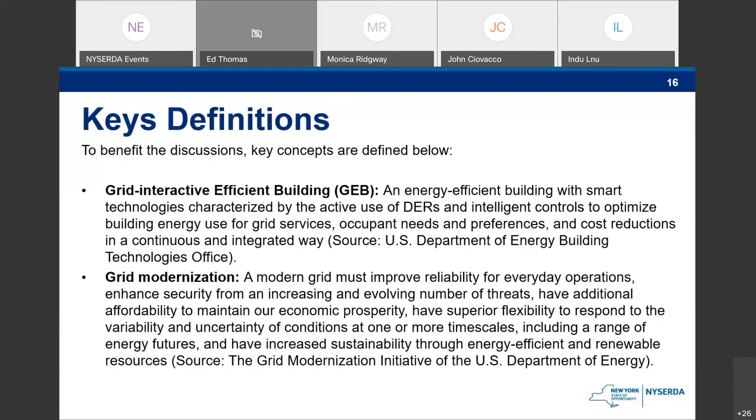As noted, we're going to start with a series of presentations. I'm not going to read these word for word for you, but Cara Carmichael is a principal at Rocky Mountain Institute. My quick read of this is that she's a grid interactive zero energy building expert, and so I presume that's what she'll probably talk to us about. Again, you can look at these at your leisure. The next is Rebecca Kraft, who is an electrification expert with lots of rate design experience and has worked inside utilities as well, which is good. She's with Sidewalk Labs, an advisor to them.

Dan Egan is Senior Vice President of Sustainability and Utilities for Vornado. He comes at this with a real estate perspective, over 30 million square feet under management. So that's a really important perspective when we're talking about GEBs for sure. And then lastly is Ed Thomas. He's the Executive Director of Peak Load Management Alliance, which pretty much says what he's going to talk about. So I'm going to not belabor that at all and get us right into these speedy presentations, and therefore, Cara, you're up.

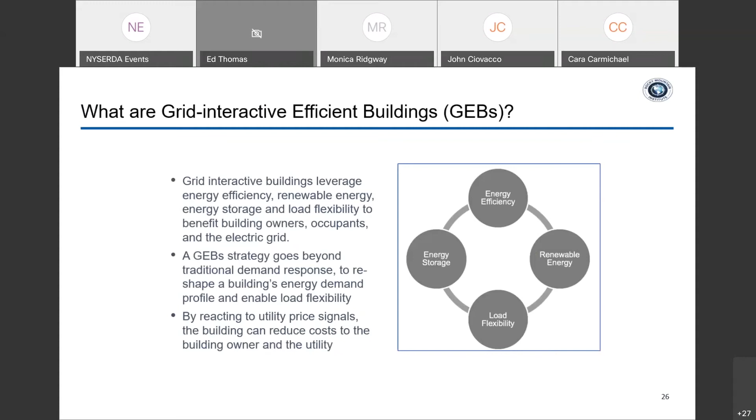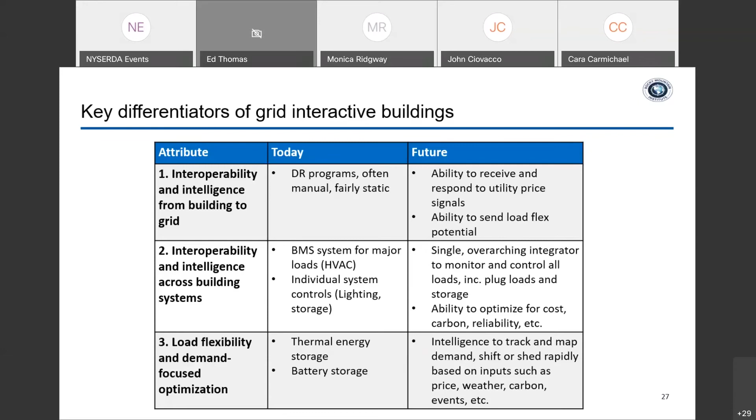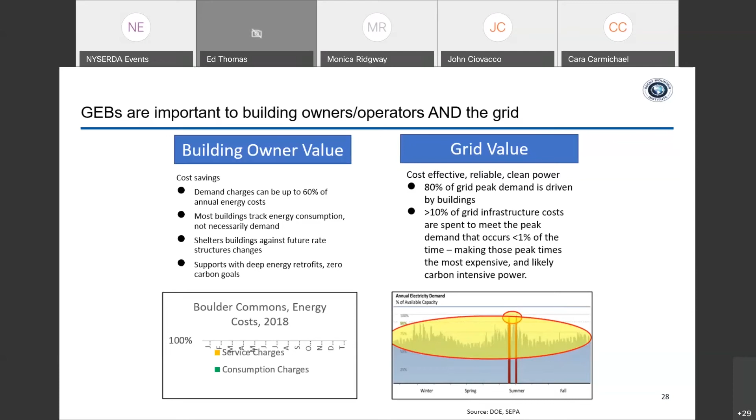So it's also worth noting that in New York State, there's some correlation between wholesale price and emissions, which is good, whereas in other parts of the country, like California, there's a gap that many utilities are struggling to rectify through rate structures.

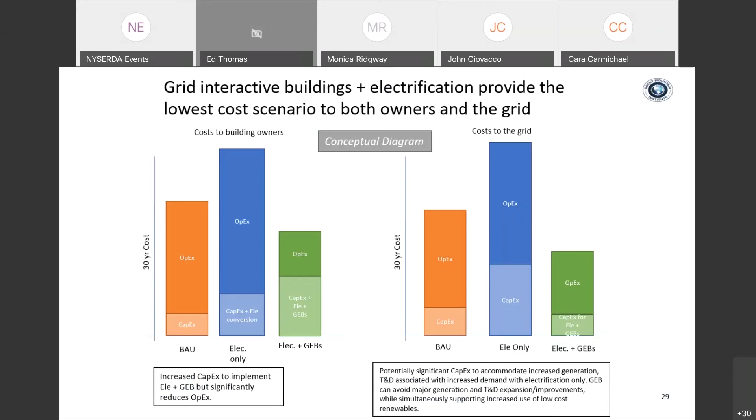So the second topic I just wanted to share with the group was some work that was done by a task group under the General Services Administration Green Building Advisory Committee. And so about a year ago now, we published 13 policy recommendations around grid interactive efficient buildings, and I'm thinking it could be a good resource for this group.

So next slide. So there were 3 main categories for these recommendations, and I'm just pulling the highest priority recommendations from that. And it's worth noting that New York has a head start here, since there's already somewhat of a channel for distributed energy resources, that market created through the REV process. So of these high priority policy recommendations, I think the 3 that are most relevant are A1, B1, and C1.

So A1 provides language for goal targets that are not only energy use intensity focused, but also demand focused. And since this has been done, several key efforts in the industry are actually leading in some metric creation around what a demand target could look like, including Lawrence Berkeley National Lab's Flex Lab work, as well as New Buildings Institute's Grid Optimal initiative. And I think New York already has an edge here as well with Local Law 97.

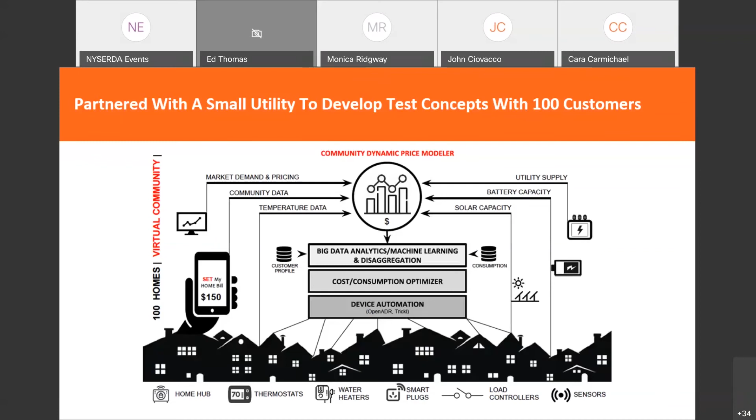On the commercial side, similar kinds of problems. Studies show that the buildings use way more energy than their code compliance model, and that energy use varies widely between buildings, even though the age and ratings may be the same. We also know that tenants drive a lot of this use, and they don't have a lot of opportunity to control temperature, hot water, lighting, plug loads. No one's looking, and no one's controlling.

And finally, we think that most equipment is run with a set it and leave it approach, where loads can change things. Often there are lease structures that prohibit efficient changes for optimization and efficiency, and tenants can't really get what they want when they want it. So as on the residential side, we think that first studying and then automating a lot of this opportunity is critical, so tenants don't have to pay attention to energy demand when that's not their business.

But we think building automation has to really provide information needed in the moment to plan for the right outcomes in the next moment and beyond. And that has to shift over time and learn over time. It also has to be that the systems that do this are kind of open source, modular, and replicable. Otherwise, it's way, way too expensive to do this kind of thing on a one-off.

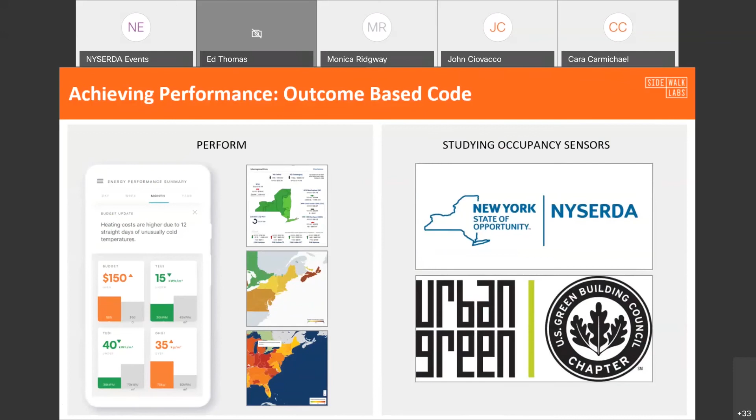And we started to, and we're interested in doing more of this, which is adding occupancy counters to dozens of new buildings in New York to better understand the relationship between energy and occupancy. And we're exploring the grid side of the NYISO right now. And then let me talk some more about what we're doing in Toronto.

It has all the components I mentioned before about the rate. We have proposed there a thermal grid, partial geo exchange, waste heat recovery, that design change. The idea is that we would control both the resources, on-site solar, on-site storage, all of demand and end use, together with the thermal grid in sync, so that we can produce an optimized outcome, both to reduce bills and

to reduce demand. And when we modeled this, the business as usual demand for that 3 million square foot development was about 5.5 megawatts without electrification. If you electrified everything in a business as usual way, that demand goes up to over 11 megawatts. The passive buildings take that down quite a number. The thermal grid, and there's not going to be any natural gas at the development, so that drops the demand the most. And by the time we factored in energy end use, we were down at 5.3 megawatts.

So that's a big change. That's a lot of embodied carbon you don't have to face by increasing the size of the grid. And it's a lot of carbon, and in Toronto, where most gas is on the grid during peak, it makes a massive difference on not just megawatt hours.

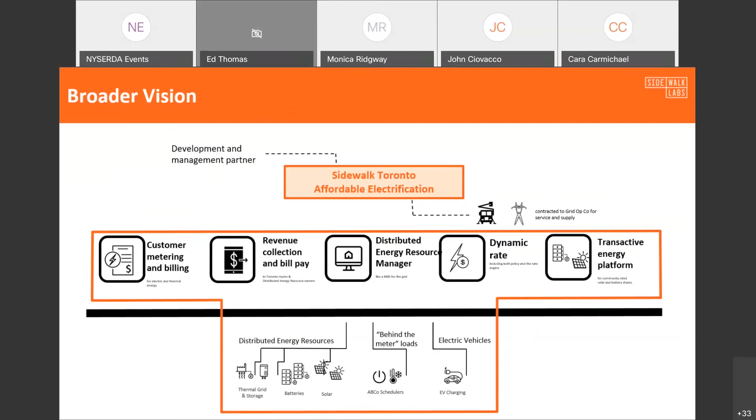Thank you for having me this morning. Happy to be representing the real estate industry in this conversation, or at least in the lightning round. Have plenty to say for this afternoon when we talk about what's happening inside the building and how there's a lot of solutions there and challenges that fall within the purview of this discussion.

But talking about this morning's topic, I will say the real estate community, there are many motivated leaders in New York City who are advancing decarbonization goals, have been prior to both of these laws, and are looking to continue doing such. But I think that where we are right now is forcing real estate companies to take pause while some of the uncertainties about these policies are determined.

So this slide highlights 4 of the largest uncertainties as I see it, as it pertains to the grid. The first being the future rate of carbon intensity for electricity and where that's delivered. So we've had a lot of conversations about geography and how those different regions are interactive with one another in the grid. I've personally had many conversations at a federal level talking about how New York ISO's geopolitical boundary is unique in this country, in that we have the ability to control the state's energy planning within a coterminous boundary with the state itself.

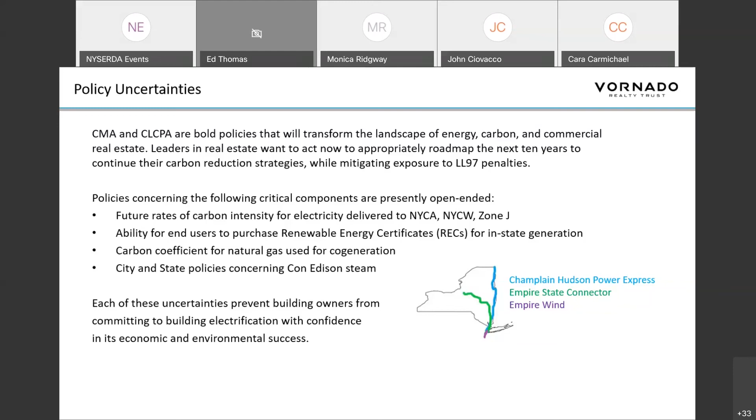I think that we value electrification, and we understand that in an environment where the electric grid is truly carbon-free and sourced renewably, to have an all-electric building solves a lot of problems. I appreciate Greg's comments in the beginning talking about existing buildings and the challenges with doing this in a phased approach with gradual capital planning. I think with some data-driven solutions and certainties, the real estate community can probably move forward with a little more confidence. There's major capital decisions waiting in the rafters depending on how the details of both city and state policy are determined.

This just discusses some data solutions. I borrowed an image from one of my favorite annual publications, the Power Trends Report from New York ISO. I can't focus enough on the carbon coefficient of electricity. We know what it will be through 2025 here in the city. We don't know what it will be past that.

I understand I'm sitting here in the PSC office, and this is not a city agency, but I can't stress enough to open up the communication lines between the two so that one agency understands what the other is working on. We've had a lot of conversations about where to draw the boundary around the sort of relevant zone of electrical generation. We really appreciate the notion of the Climate Mobilization Act that one must narrowly define renewable power in order to truly start to decarbonize the electricity that's generated here in New York City.

However, I think we need to understand if there are opportunities beyond a very short list of transmission projects that will actually further progress towards decarbonizing electricity in New York City. Vornado, I think over 80% of our assets are here in New York City. Our stakeholder group are New York residents and employees. It's really important to us that the public health and environmental benefits of a cleaner grid are realized here in New York. However, we have an opportunity to be an active and influential participant in that, but without knowing some greater detail or perhaps having a broader opportunity to participate, we may miss that sort of partnership that could happen.

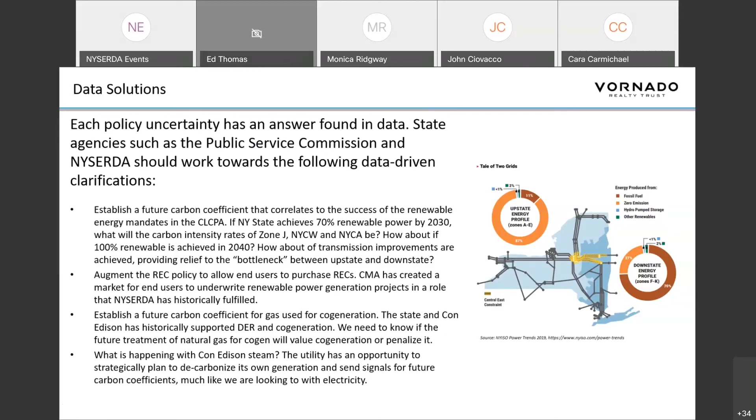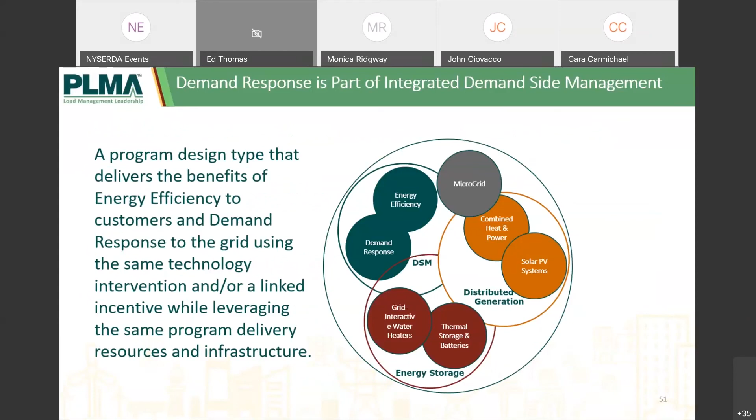Next slide. We like the fact that you're really taking this holistic approach, including demand response along with energy efficiency and storage, and we just want to validate that perspective. Next slide. And to build on what Cara and some others were alluding to, if you can continue to build this, maybe next slide and then to the next one.